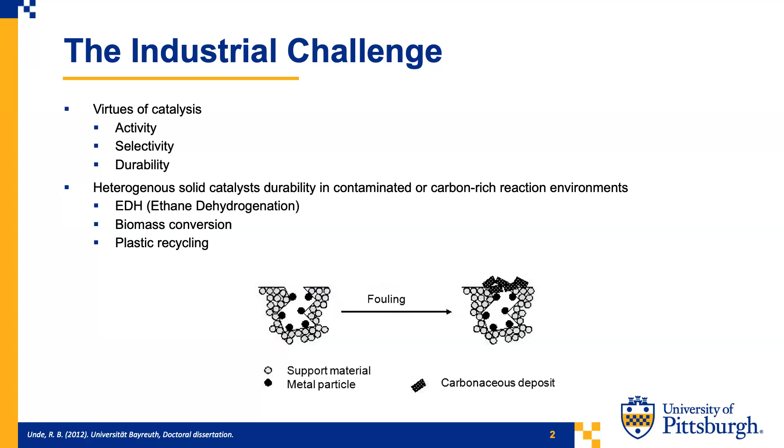Heterogeneous solid catalysts are mainly contaminated in carbon-rich reaction environments. For example, ethane dehydrogenation, biomass conversion, and plastic recycling all suffer from carbon deposits during the reaction, also called coking. Because of coking, activity and selectivity are affected, which ultimately reduces the lifespan of a catalyst. Now we focus on ethane dehydrogenation. Ethylene is produced via steam cracking, one of the major greenhouse gas emission producers alongside ammonia, and there's an urgent need for coke-resistant stable catalysts to improve process efficiency.

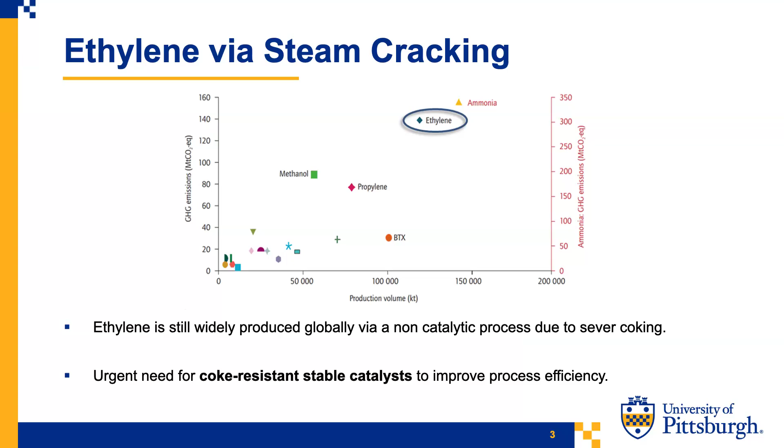Liquid metal emerges as the coke-resistant solution to this problem. It has resilience against coking because the coke formed during the reaction is lifted above the liquid metal due to density difference and buoyancy effects, and we can separate the coke out easily. Liquid metal enables catalysis in continuous operation; we don't have to replace the catalyst as the coke is separated via buoyancy. And liquid metal has high thermal conductivity.

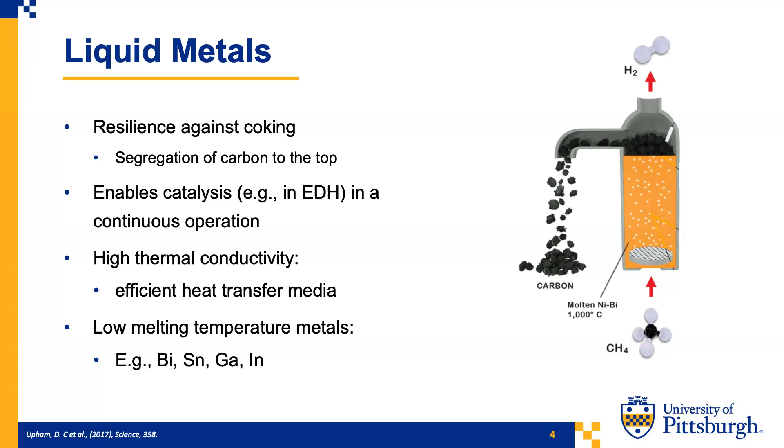It has efficient heat transfer media, and we will be focusing on low melting temperature metals, for example bismuth, gallium, and tin. Now, this is the EDH setup in our lab that we are using. This is the frit reactor, and frit basically means gas distributor at the bottom of the column. It acts as a sparger for the gas inlet, and the video shows the ethane bubbling through the bismuth column

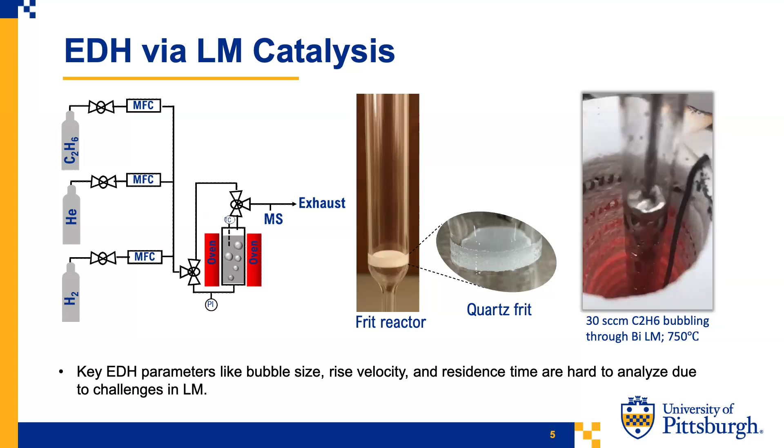And liquid metal has a scarcity of data, hydrodynamic data for liquid metals. And the conventional correlations may not apply. We cannot use cold analogs like water or oil or glycerin to mimic the same hydrodynamics in the liquid metal column. And the solution is to model multi-phase hydrodynamics via computational simulation.

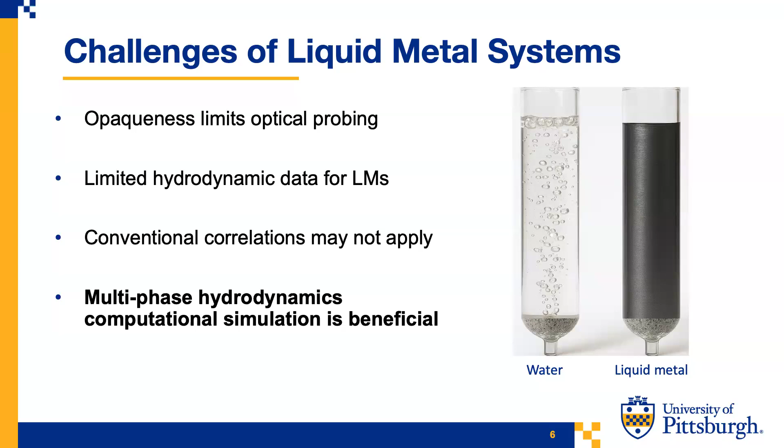And there are three key objectives of my research. The first is to examine the validity of conventional hydrodynamic diagrams, for example the Grace diagram, which I will explain later, for liquid metal bubble column systems. The second is to simulate the bismuth liquid metal bubble column reactor via CFD for EDH, and validate the obtained modeling results against our in-house experimental data. And the third objective is to study different liquid metals and focus on how their properties affect bubble column hydrodynamics.

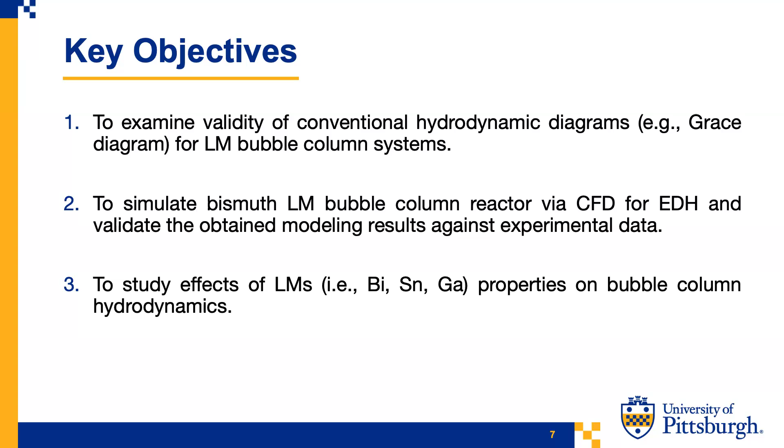Now I will go over what the next few slides coming up in the presentation are. First, I will explain the CFD methodology I've used to model the bubbling system. Before we actually do the simulation, we have to validate it against published data to see if whatever we are doing in the simulation is valid or not. I will show the validation against literature reported data.

And next, we will move on to simulation of liquid metals after the validation. We will first qualitatively validate it against hydrodynamic data, like I mentioned before, for example, the Grace diagram. Next, we will validate it against our in-house experimental data. And then, using CFD, we will compare different liquid metals: bismuth, tin, and gallium.

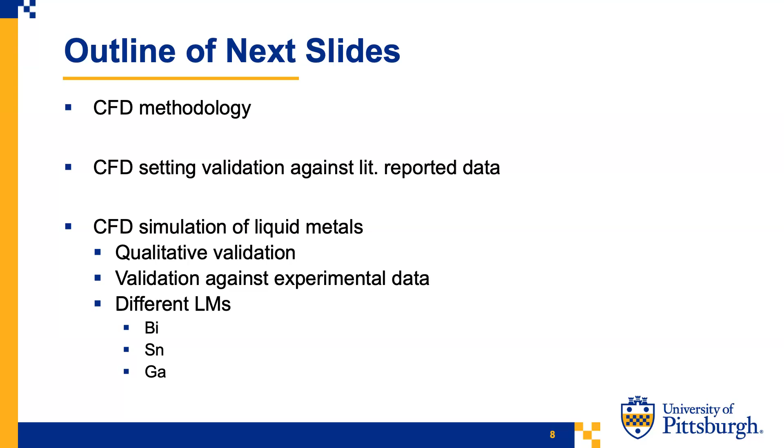The key assumption in our CFD is that the flow is incompressible. Both gas and liquid are incompressible; there's no change in density over time in the system. It's an isothermal condition, so we are not solving the energy equation. There's no chemical reaction involved. And there's no diffusion between phases, no mass transfer between the gas and liquid phase.

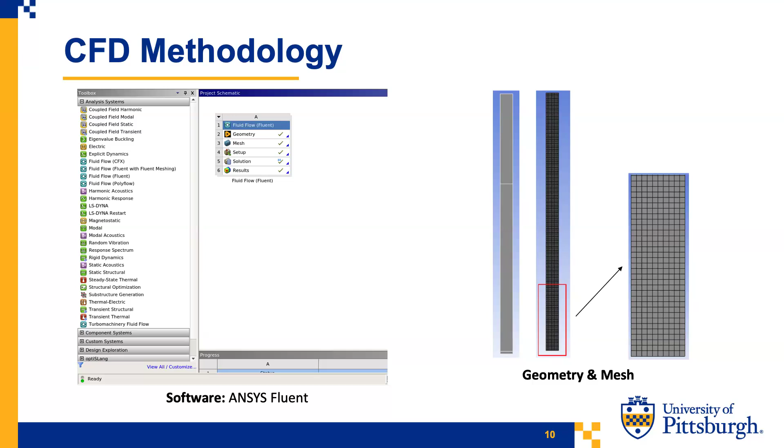It's a 20 centimeter reactor. The liquid metal is filled up to 13 centimeters here, and the frit is 2 millimeters at the bottom of the reactor. And this is the meshing I have used. It's a default meshing. I have tried different meshing, hexahedral or orthogonal meshing, and I found that default meshing works fine for our simulation. In the CFD setup, first we have to put in the general settings, such as the solver type we have to use.

There are two types, the pressure-based solver and the density-based solver. Like I said in the assumptions, since we have incompressible flow, we are going to use the pressure-based solver, and we are going to do a transient simulation rather than a steady-state simulation, because a bubbling column cannot truly be at steady state because it's always dynamic. And we are putting in the gravity.

The next step is to choose the multi-phase model that we are going to use in the system. There are 4 multi-phase models that we can use: the volume of fluid method, mixture model, wet steam model, and Eulerian model. I'm going to use the volume of fluid method.

I will explain later why. And next is to choose the materials. We have 4 materials: gas, ethane inlet, and 3 liquid metals: bismuth, gallium, and tin. We put in the materials, and we put in the boundary condition. We have 3 boundary conditions: inlet condition, outlet condition, and the wall condition.

Inlet is a gas flow rate. We use SCCM mostly, standard cubic centimeters per minute. And the outlet condition is pressure outlet. We define that the gauge pressure is 0 at the outlet. That basically means it's atmospheric pressure. And the no slip condition, that's the wall condition.

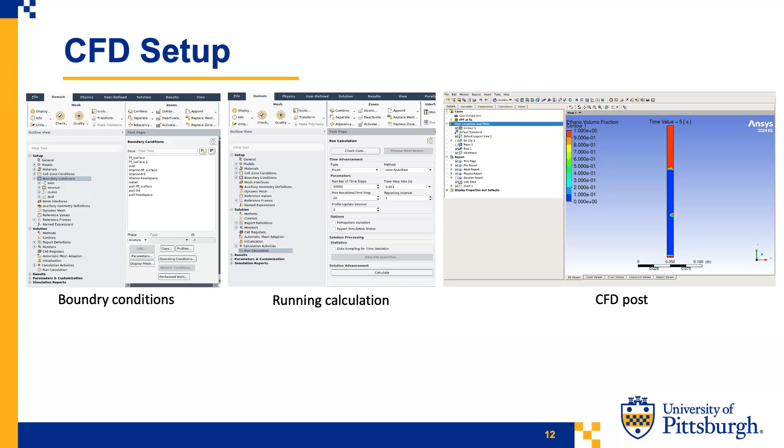After putting the boundary condition, we run the simulation. We have to choose the number of time steps and time step size. I'm going to use 0.001 as my time step. I will explain later why. We did a time step sensitivity study and found that this is the time step we are using. And after running the simulation, we are analyzing the results in CFD-Post. We can plot graphs, contour plots, velocity vectors, and XY plots, for example.

Next, the multiphase modeling approach. I used volume of fluid because volume of fluid captures the interface between gas and liquid very accurately, the sharp interfaces, and it's suitable to track the bubble motion in the system, how it evolves in the system. And volume of fluid handles large density and viscosity ratios very well. It's critical in liquid metal systems.

And these are the two equations volume of fluid solves, where alpha is the volume fraction of a phase, and m_pq and m_qp are mass transfer between phases. Since we don't have any mass transfer between phases, that term becomes 0, and S is the source term, that is the external field effects if you want to add anything. And the second constraint basically says that in an element, the overall volume fraction is always 1.

If you look at the left side image, we see that there are different elements, and the darker region is a bubble and the lighter region is the liquid. We can say that an element entirely inside the bubble has volume fraction 1, and outside the region it is 0. When there is an interface between bubble and liquid in the element, the constraint solves it: this is 0.3, this is 0.6, this is 0.3. That means 0.3 is the volume fraction of bubble and 0.7 is the volume fraction of liquid.

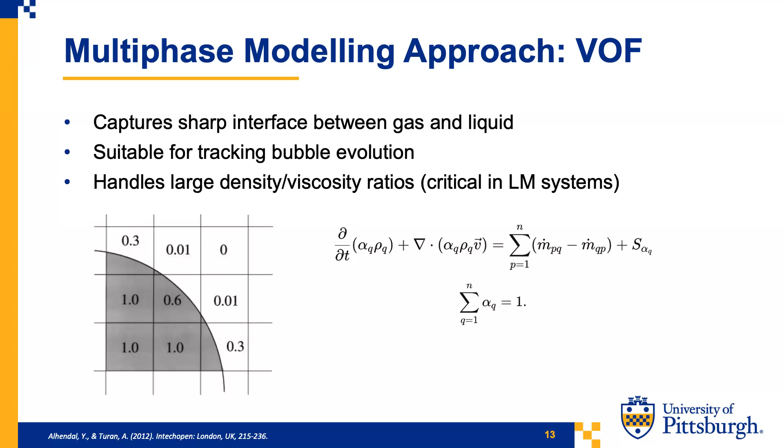So now that we have been through the methodology, before we actually do a simulation, we have to do a mesh and time step sensitivity study. For mesh, I chose bubble rise velocity versus time as the parameter. I analyze how bubble rise velocity changes with time for each mesh.

And same with the time step sensitivity study. I tried different time steps, and we can see that the bubble rise velocity is almost the same for the different time step sizes, and it doesn't take too long. The time step size I chose is the second one, which takes 1:35 hours.

The main constraint while choosing the time step and element sizes is the Courant number. The Courant number should be less than 1. That assures us that the solution is numerically accurate and there's no diffusion in the system. The Courant number is velocity times time step size divided by element size. It should be less than 1 for a typical simulation. Since we are doing bubble column systems, it should be less than 0.25 to be numerically accurate.

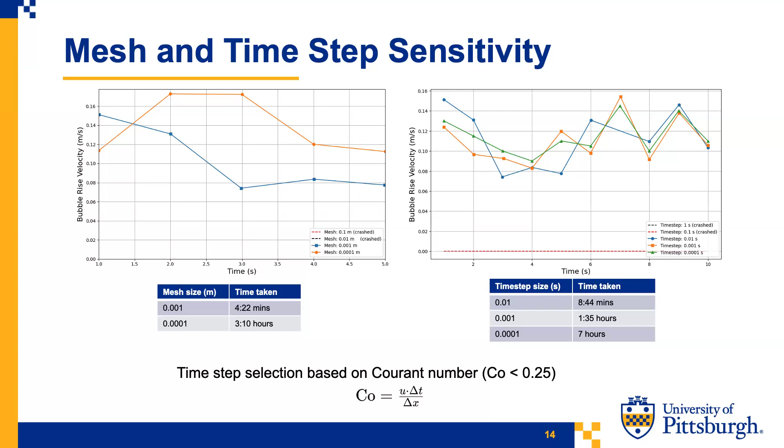Now that we have confirmed the mesh element size study and time step size study, before doing actual liquid metal simulations, we have to validate against literature. This is the first validation I did. It's bubble rise velocity in water.

It's a 2D geometry, 20 millimeter by 100 millimeter, where a 4 millimeter bubble is placed 1 centimeter from the bottom of the reactor and let go. We are going to see how it evolves in the system and quantify the bubble rise velocity across time for this validation study.

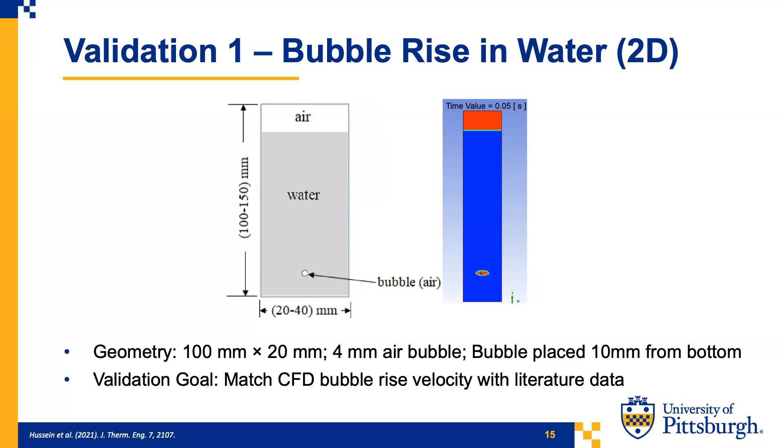These are the results I got. It's plotted between bubble rise velocity versus time. My work is the green line. It matches well with the published experimental method and the CFD method they used in their paper. And there's no curve fitting applied. So we can say with confidence that whatever simulation I'm doing matches with the experimental method and the CFD

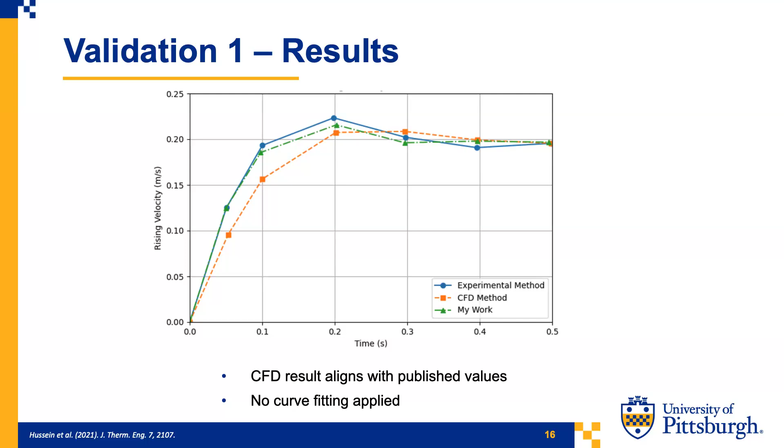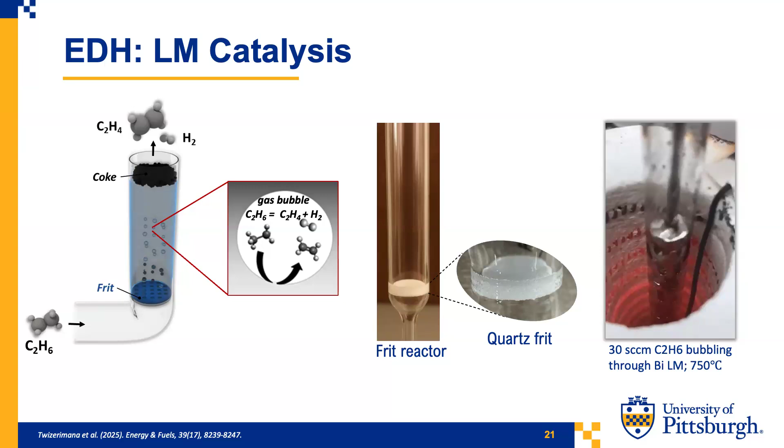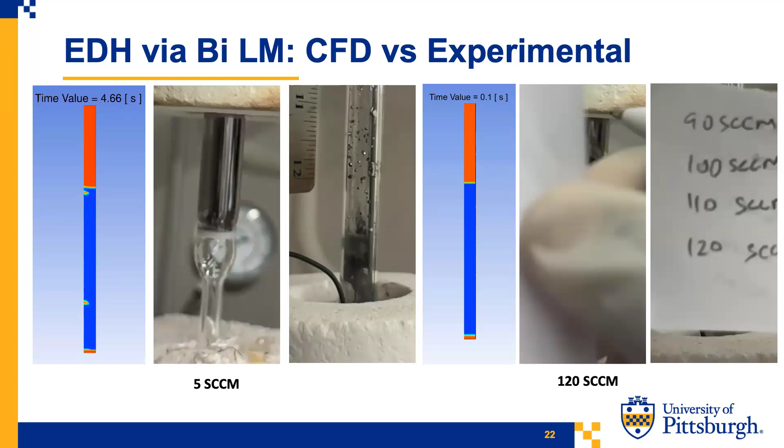Now that we qualitatively validated the shape of the bubbles, we are moving into our actual experimental results. Like I explained before, this is the experimental setup in our lab, and we are comparing with our CFD. So this is the CFD result with the experimental result; first is the 5 SCCM case. I will run the 5 SCCM case. This is the bottom of the reactor. That's a frit, and that's the top of the reactor. We can see that the bubble rising in the CFD is almost matching well with the experimental at the bottom of the column. We can see small bubbles, and it's almost steady state. There's not much turbulence in the system.

Now I'll run the 120 SCCM case. We can see that the simulation and experiment are both very turbulent, and we can say that the CFD I did matches with the experiment.

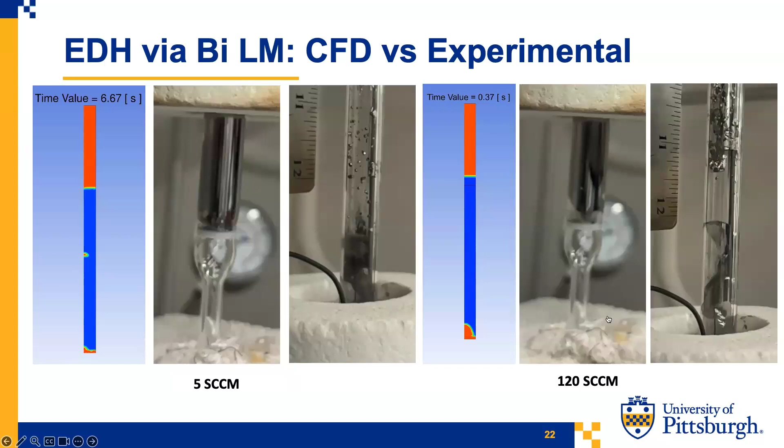There's one interesting thing I observed: when we run the experiment, there is a circulation in the column. If you watch the video here, this circulation is caused as the bubble rises: the liquid metal at the top of the bubble displaces to the bottom to make space for the bubble. This causes a circulation in the system.

This circulation, if you look at it at the bottom of the frit, causes the evolving bubble from the frit to move to the wall. This also contributes to why the bubbles stick to the wall.

Another thing I noticed is when the liquid metal displaces from the top to the bottom across the bubble, it grazes the bubble and causes breakage in the bubble shapes. If you watch the video, when the liquid metal moves down, the larger bubble breaks into smaller bubbles with the liquid metal and goes down. This is another interesting thing I noticed.

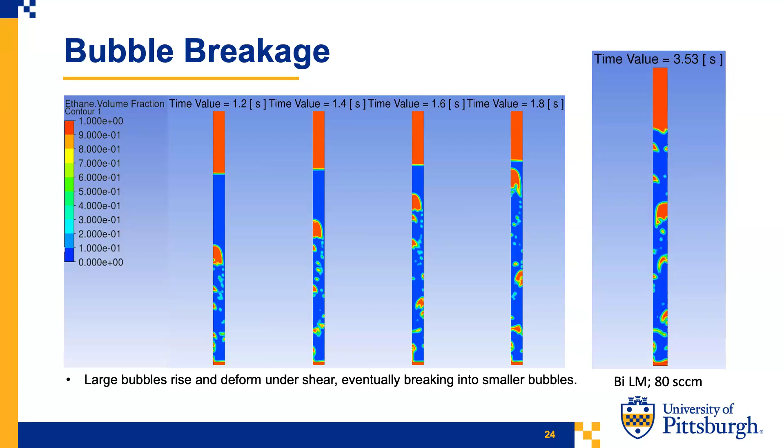Now we will quantify our data. First is the gas holdup analysis. We will compare it with the experimental quantification. This is a 20 centimeter column filled with 13 centimeter liquid metal. It's a pure ethane system at 1 atmospheric pressure and 600 degrees Celsius. The method to measure the gas holdup is the displacement method.

This is after the gas inlet starts to flow, and this is before the gas starts to flow in the system. If we measure the difference, that's the amount of gas trapped in the system - that's the gas holdup. Gas holdup is basically volume of gas divided by volume of gas plus volume of liquid, and we can measure it using this method.

On the right side, I have plotted gas holdup versus gas flow rates for 3 different flow rates: 5 SCCM, 20 SCCM, and 40 SCCM. We can see that at 40 SCCM, the CFD and experimental gas holdup matches very well. At 20 SCCM, it's slightly higher, and at 5 SCCM, it's slightly higher.

The discrepancy at 5 SCCM is because when we were doing the experiment without the inlet flow rate, the liquid metal doesn't come above the furnace for us to measure it. I had to look into the furnace to measure the height of the liquid metal, which caused a slight disruption in the gas holdup for very low SCCM flow rate. Again, good agreement is observed between CFD and experiment, validating the model's accuracy.

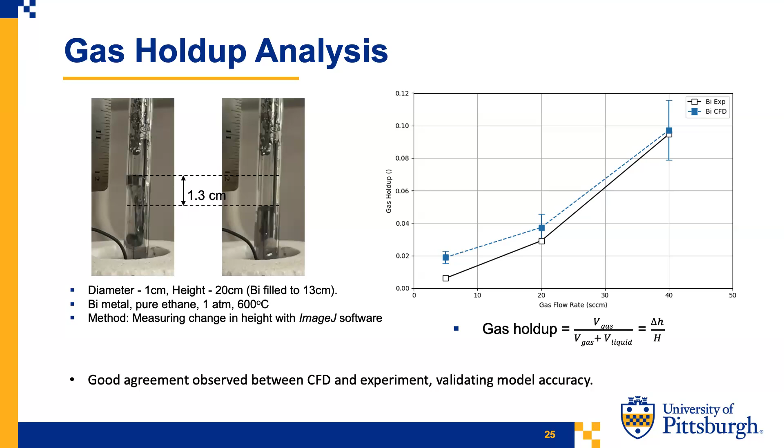Now that we have validated our model against experimental results, we will move on to model different liquid metals and compare the gas holdup. This is gas holdup plotted on the y-axis. We have the same gas flow rate for 3 different liquid metals: tin, bismuth, and gallium.

We can see that gallium, the green line, has the highest gas holdup, and bismuth has the lowest gas holdup, with tin, the blue line, moderate between the two. This is because gallium has low density and high surface tension. If the surface tension is very high, the bubbles cannot break the surface tension at the frit, so gas accumulates at the bottom and becomes large enough to break the surface tension and move into the bubble column. So the bubble size is very high, and if the bubble size is high, the gas holdup increases. Because of high surface tension and low density, gallium shows the highest gas holdup and bismuth shows the lowest.

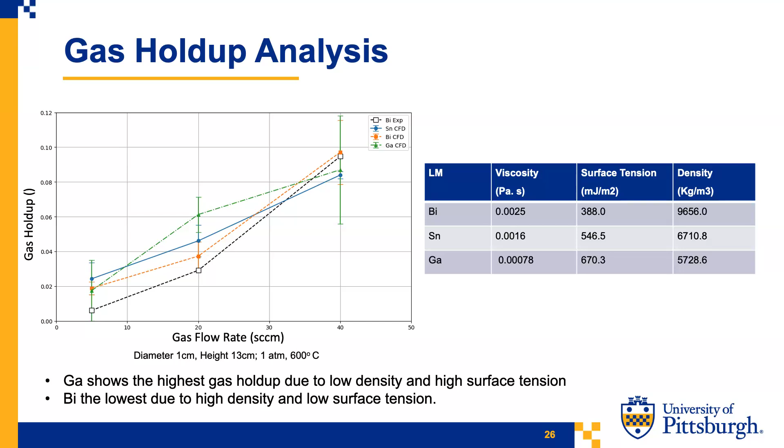Now we will compare bubble sizes. This is a plot between bubble Sauter mean diameter and flow rate. Sauter mean diameter is a method used for averaging the diameter of the bubbles.

We cannot average it directly because the smaller bubbles are very large in number in the system, so it reduces the average. We have to eliminate the smaller bubbles and focus only on the larger bubbles to accurately calculate the diameter. The formula for Sauter mean diameter is the summation of each individual bubble diameter cubed, divided by the summation of diameter squared.

With this method, I have plotted the bubble size across different flow rates. We can see that again gallium has the biggest bubble, like I said before. Since gallium has the highest surface tension and low density, it doesn't detach from the frit easily and starts accumulating at the bottom. Once it becomes large enough, it moves into the system, so the bubble size is very high. Bismuth shows the lowest bubble size because it has higher density.

Bismuth has a very large density, so the detachment is easier. If the density is higher, the bubble sizes are smaller and can detach easily. So the bubble size is lowest in bismuth, and tin is intermediate between bismuth and gallium.

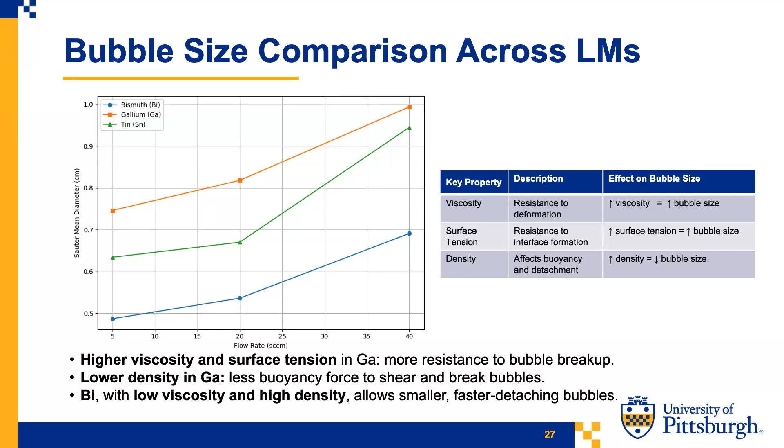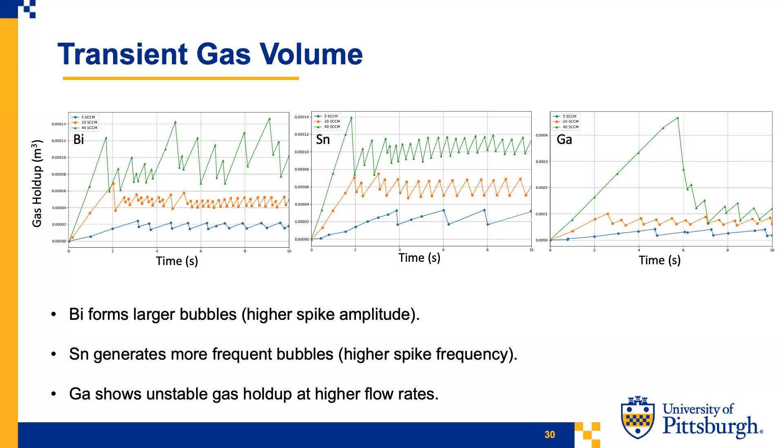If we look at this video for bismuth and tin, you see that bismuth, because of shorter detachment time and smaller bubble sizes, rises faster due to a larger density difference. Bismuth has the highest density, so it rises quicker than tin, and coalesces around the top of the column. Even though the bubble size is smaller, once it reaches the top, it coalesces into a bigger bubble and leaves the column. That's why there's a larger spike in the bismuth case, even though the bubble size is smaller.

For tin, if you look at the case, there's not much coalescence in the system because the rise velocity in the tin case is lower compared to bismuth. So there's not much coalescence in the system compared to bismuth, and there's a larger number of gas bubbles leaving the system compared to bismuth.

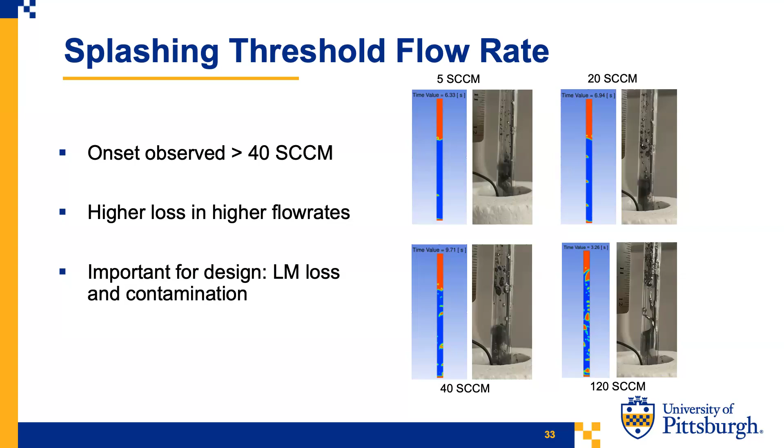We come to the conclusion, shall we?

The conventional hydrodynamic diagrams could cover bubble shape behavior of liquid metal systems. We did that with the Grace diagram validation. We can say that hydrodynamic diagrams still satisfy high density, high surface tension liquid metal systems. And CFD simulation is a powerful tool for categorizing bubble dynamics and bubble column hydrodynamics in ethane dehydrogenation in a bismuth liquid metal column.

We can infer that gas holdup is strongly influenced by density, bubble shape is primarily affected by surface tension, and bubble size and detachment is primarily affected by viscosity. Hydrodynamic behavior varies significantly based on different properties of liquid metals. Viscosity affects bubble breakup and size, surface tension affects shape and instability in the system, and density determines the buoyancy and lift forces in the system.

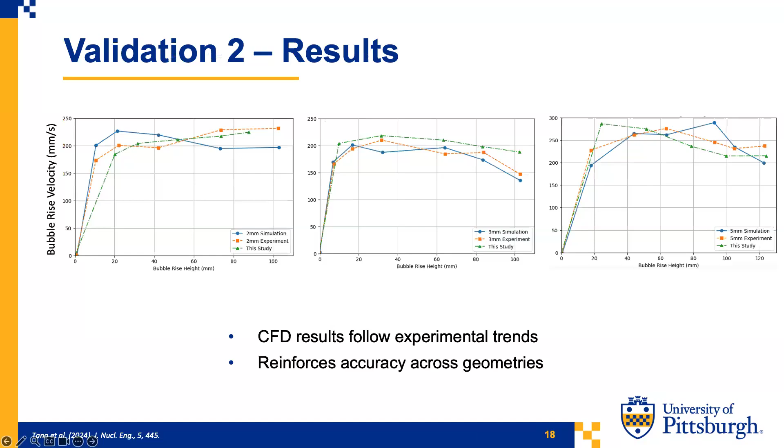Yeah, I think go back to the validation two. Yes. So I noticed your model is 2D, let's say 3D. Validating a 2D model against 3D, are you making assumptions? No. I did a 3D modeling here. That is my model. Okay, so your validation here is the only 3D simulation. Yes. All my other simulations are 2D.

I chose this specific paper to model because our experimental model is constrained by wall effects, it's dominated by wall effects. I chose this geometry because it also has a very large number of wall effects, to see if whatever simulation I'm doing is still valid in geometries affected by wall effects. So that's why I chose this 3D geometry. And it has both literature data and their simulation data in the paper that I can validate it against.

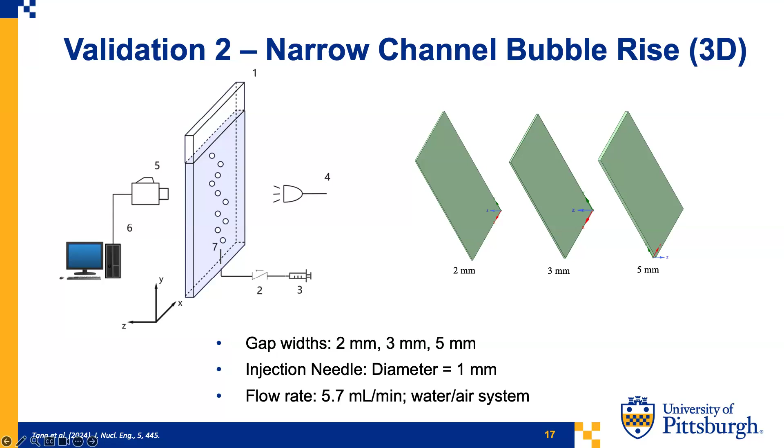Thank you very much. Maybe, Steve, you might want to start. No, please, I've been part of the discussions the whole time. I have a lot of questions. Okay, I'll start. By the way, great work, great presentation. Very nice, I can tell you did a lot of work. So I'll start with the assumptions to model.

So definitely I can't criticize any of these assumptions because the validation of those is excellent. Thank you. So now you assume that the temperature is constant, right? Yes, we are not solving for the energy equation. And also there is no reaction. No, there is no reaction. Is a source also included in your model? No, it's not. Okay.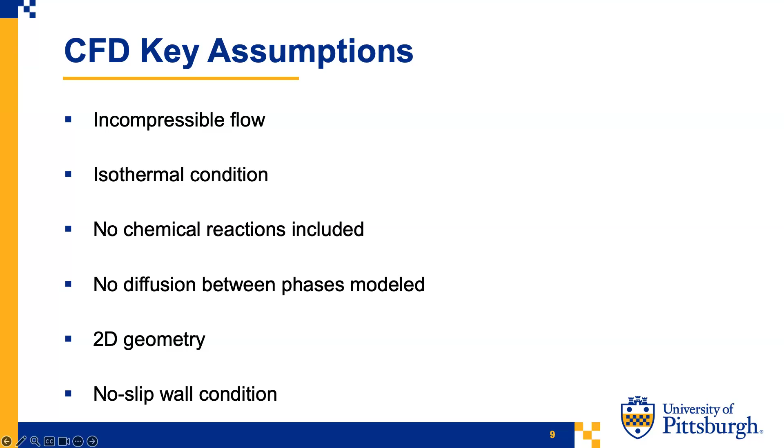Okay. Can you show me the plot, the Grace plot, like this? Yeah, this here. So based on your study, what shape of bubbles do you want to have during the reactions? Ideally, smaller bubbles with spherical shape, which can increase the surface area, because the reactions happen at the surface of the bubbles. So I would say the spherical shape is ideal for reactions. Because of the stability? Spherical is more stable.

But don't you think that the spherical cap bubbles have a larger area? Yeah, but for spherical cap bubbles we have to go for higher flow rates. If we increase the flow rate, we can get spherical cap bubbles, but the residence time decreases, because it's like a bullet that enters, forms a spherical cap bubble and leaves immediately. If we want to increase the residence time in the system, we have to go for a stable spherical bubble.

Why do you think you need a higher residence time or lower residence time? I would think it's higher residence time. Maybe, right? Should we have a kind of an optimal residence time? You give a lot of time to your reactants, and some of your products might get further converted to byproducts you don't like. So we don't actually know the mechanism that happens inside the liquid metal system, how the reaction takes place. But if we go over a certain limit, the byproducts, coke formation, can be very high if the residence time is very high.

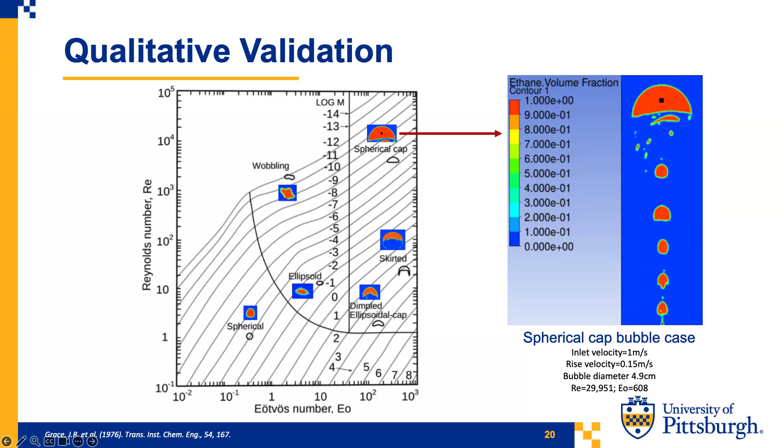The other thing is that you showed the hydrostatic pressure, the pressure drop in the column. What do you want to show with this exactly? This is just because of the density difference, right? Yes. What I was trying to achieve was to see how increasing the gas injection flow rate will affect the pressure drop in the system.

I went as high as the 120 SCCM case, but the pressure drop didn't change irrespective of my gas inlet flow rate. So it doesn't depend on the injection flow rate, it only depends on the density of the liquid.

So did you see, I'm not a CFD expert, but is there any way to investigate also the pressure across the bubbles? Yeah. Pressure drop. So I did try to find the pressure inside the bubble. It depends on surface tension and the length and width of the bubble. Yeah. Because that would be more important than this.

This is ultimately, when I went through this and actually did the quick calculation, I can draw this line with pen and pencil. All I need is the density of the metal and I can draw the line. So Hseen's point is exactly right, it would be really interesting to know how the gas pressure inside the bubble changes from the bottom to the top of the column. How does it change with the size of the bubble, things like that? Because that again goes back to our interest in using that as a reactive environment.

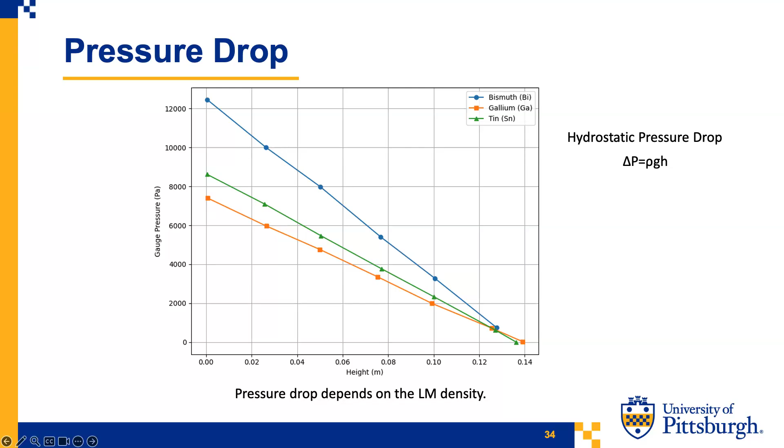And then you showed nice transient plots, right? Can you show these plots also for the different metals and different rates? You mean the transient gas holdup? Yeah. Here you're also calculating the gas holdup for different flow rates, right? Yes, different conditions. Did you try to study the gas holdup as a function of dimensionless numbers like Reynolds number? Because that way maybe you can generalize it for other metals, not only these three. Would that help, you think?

I mean, if we do more work, we can try to find an empirical correlation between different properties, density, surface tension, and gas holdup equations. I don't think we can totally generalize it. We can only do a case-specific dimensionless number quantification for gas holdup to make a general gas holdup equation. I don't think it would be difficult.

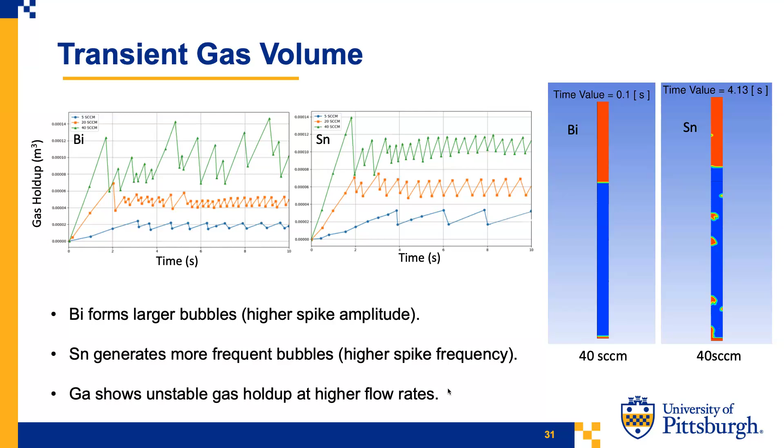I have actually one observation here. If you go to gallium, I have a question there for you. I was just thinking about it. Do you expect this behavior to continue, or is it going to just go stable after, let's say, 10 seconds? If you keep simulating this, are you going to be in a regime similar to bismuth and tin forever, or can this phenomenon start to take place again? And the other question: if it's not going to happen again, what's the reason?

Okay, so what's happening here? I'm curious to see this for 30 seconds. It's actually the same question, just flipped around. Why does this happen? You're pushing that liquid up continuously, and at some point it suddenly decides it's done, and the bubble breaks off. There are two reasons I can think of for this to happen.

The first reason why this is happening is because gallium has the lowest density and it's basically being pushed up easily compared to bismuth and tin. And why this is happening is because the surface tension is very large. So for the bubble to break the surface tension, it has to accumulate enough pressure in the gas phase to break the surface tension of the liquid metal, and the bubble starts to form.